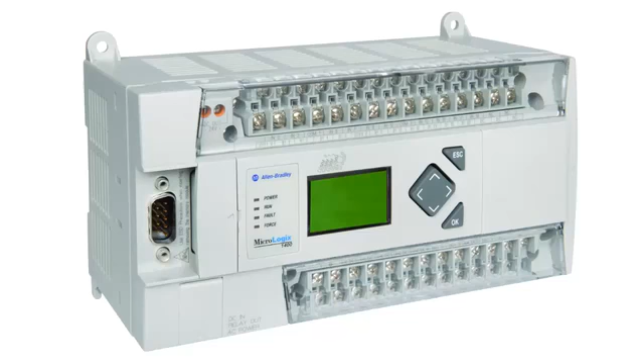The first question many people will have: what exactly is a PLC? PLC stands for Programmable Logic Controller, and that is the brain behind most types of industrial equipment and machinery.

PLC programming is quite unlike computer programming in the traditional sense. When you think of programming languages such as Java, Visual Basic, and C++, you imagine lines of code made out of words structured almost like sentences. PLCs, on the other hand, typically run on something called ladder logic, which looks more like an electrical diagram or schematic that has logical blocks or instructions which tell the processor how to function and what operations to perform, thus allowing the PLC to govern the processes around it.

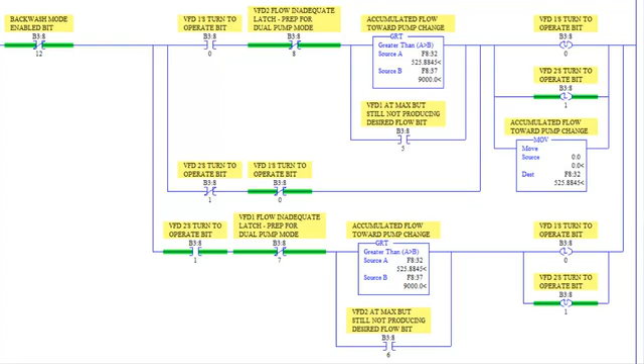If you're interested in learning PLC programming, most likely you're interested in pursuing a career in that arena. As far as careers go, I have 10 years experience programming PLCs, and it opens quite a few opportunities for a person willing to persevere and willing to master the trade. If a person wishes to travel, there's certainly opportunity. Every industrialized nation in the world has a demand for PLC programmers.

If you would rather do as I do and stay in the house and work remotely, that's also an opportunity that's more than available. And of course, punching a clock from 9 to 5 in an office is always on the table. The salary for a PLC programmer with some experience is certainly above average, and if you're working as a consultant or as a freelancer, the opportunities are generally even better.

As far as learning PLCs, there are plenty of opportunities in different institutes that offer courses. Many of the PLC manufacturers themselves offer courses directly, and the prices of those courses are nothing to sneeze at. If you have a company that's willing to send you to school and pay for those courses, it's certainly worth consideration and investigation.

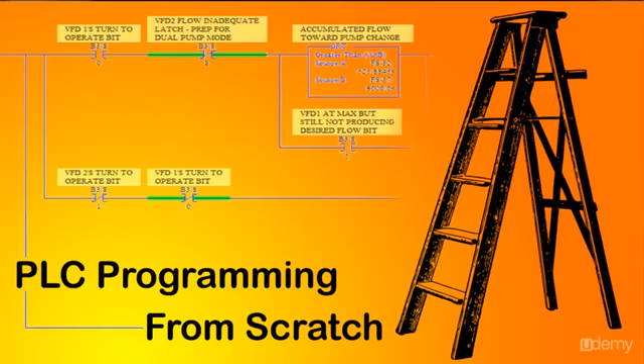However, if you're looking for the most economic means of learning how to hit the ground running and program PLCs within a month, I would strongly recommend this course, because the purpose of this course is to take a novice, a person with no prior programming experience, with no prior PLC knowledge, and within the duration of this course, teach them how to originate a PLC program from scratch.

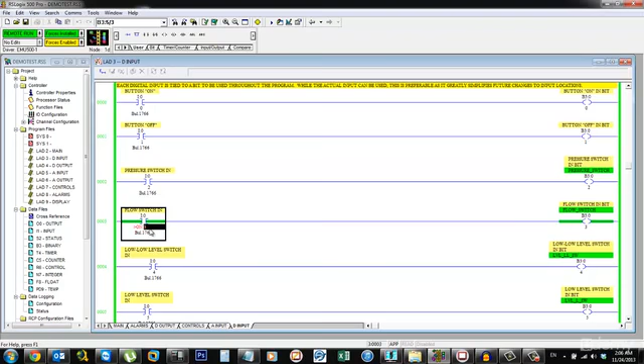What this is, is an introductory to intermediate level course. This will teach 20% of everything there is to know about PLC programming, HMI development, industrial communication protocols, logical operators, PLC ladder instructions. There's so much to learn in this field. But as the 80-20 rule goes, if you have 20% of the knowledge, you can do 80% of the work, and PLC programming is certainly no different.

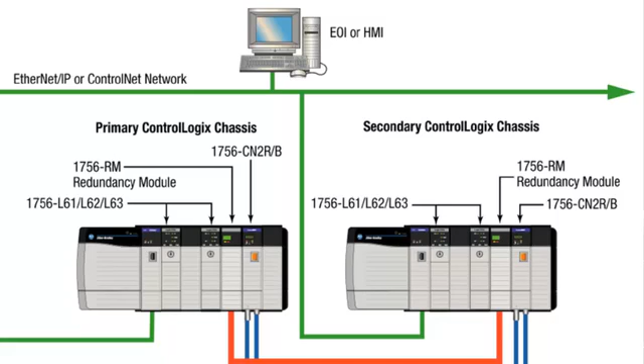What this course is not is a master course in PLC programming. This is by no means an advanced course that is going to teach every possible detail of PLC programming. This is going to teach the fundamentals and teach them very well. It's going to enable a person to start working functionally as a PLC programmer, not by any means to become a master, to become an expert, to become an instructor on PLC programming.